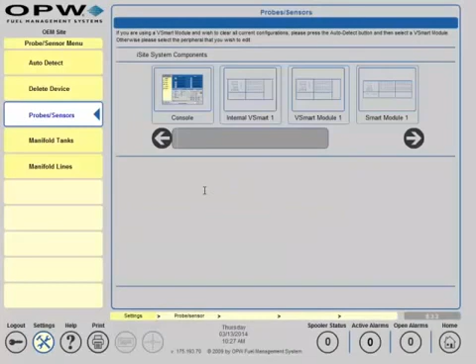But by selecting the yes button, you are basically deleting everything that was connected to the console in a prior programming mode. If you are doing an upgrade and you're adding a device to an existing site, you would definitely hit the no button to make sure that you're not wiping out any of the peripherals that are connected to the console. So as you can see, I've got the console that's up. I've got an internal vSmart, a vSmart Module 1, Smart Module 1, LIM Interface 1, and an OM4.

So now I'm going to go ahead and do an auto detect on the vSmart Module 1. And I'm going to click yes. This is brand new programming, so I'm going to go ahead and do yes. So it would wipe out anything that would be programmed on those barriers that are inside.

It's going to go out and find the probes and sensors that are connected to the devices inside that vSmart. We do have probes and sensors connected to this vSmart, so you will see when they come up, and we did wire everything in multi-drop. So you will see 4 probes on one channel, 16 sensors on another channel.

But the one thing you've got to remember is that when you're doing your auto detects, if it's a brand new site, you click yes on the auto detection. If it's an existing site and you are adding a device or changing out a probe or a sensor, you'll always want to do no. If you mess up and hit yes and then save it on an auto detect on an existing site, you will basically have to reprogram everything back in, because it will wipe out everything that was previously programmed or communicating to on those modules before.

Now once this comes up, you'll see the devices that are connected, and as you can see, I've got 4 devices on module 1, barrier channel 1, 4 devices on barrier channel 4, 1 probe on IS module 2, channel 2, and then 16 sensors on the last channel. Now if I want to do an auto detect on an individual channel, I can go ahead and do that. So when I'm changing out a probe or a sensor, this is the level 2, which is down to an individual device.

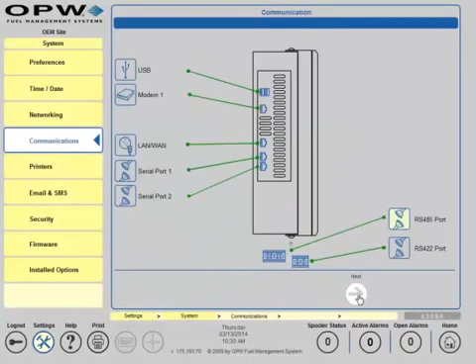Now one of the things that you have to remember is that if you are using a vSmart connected through a LAN connection, before you do your auto detection, you want to come to the settings, go into System, go into Communications, hit the Next button, and then you want to map your Petronet to the LAN connection. So you're going to highlight the LAN connection, hit Map, and then hit Apply.

Now this is only used if you're using the feature that the vSmart can be connected to the console over a LAN connection. One of the things you have to remember in this scenario is that the vSmart has to be on the same subnet as the console. I can't have the console on one subnet and the vSmart on another subnet. It won't go out and find it. But if you're doing that, make sure you do this step prior to your auto detection. Thank you.

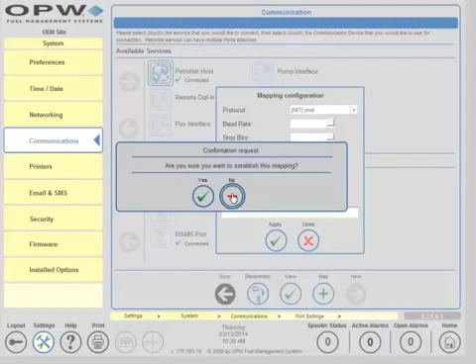Next, I'd like to show you how to put the address book and site summary into the console. From the home screen, hit the Settings tab at the bottom and then the Address Book tab along the left-hand side. Think of the address book as an Outlook contact list of contacts that will receive notifications from the console. So the first thing we want to do is hit the Add button and input your contacts. I'm going to put me in, my first and last name. Contact type is going to be administrator, manager, or technician. It doesn't have any security rights to be able to log in to the system. It's just a way for us to group contacts into certain groups.

The company is OPW. My phone number is 708-485-4200. Fax number is 708-485-4221. And then my email address, pneil@opwfms.com. Now, SMS is a paid text messaging service. It's not instant messenger on your phone. This is something that you have to have a subscription for to be able to send text messages to your phone. It's not something that a lot of people use, but it is a paid text messaging service.

Once you have your contact information in, hit Apply, and it will say that a new contact has been added. You'll see it pop up into the contact list. So let's add another contact. This time we're just going to add Lewis Bell. We'll leave Lewis as the administrator. He does work for OPW. And this time we're only going to put in his fax number. And then hit Apply.

So when we look at the first line, it says requires alarm remediation: on all alarms, only leak alarms, or none. All alarms means that any time that you have an event, whether it be a low product alarm, water in a containment sump, water in an STP sump, water in an annular space, these alarms would all have to be remediated by someone with remediation rights. If I only do leak alarms, these events are only pertaining to either a tank leak or a line leak.

And then none. None would be where the majority of these consoles are programmed, because most people don't want to have to go in and remediate. Well, what I'm talking about as remediation is that within the console I have the ability to write free-form text against any event that's happened in the console so that I can have a historical record of what a technician or a manager has done to get the alarm to clear.

So if I do none, then this icon down at the bottom won't show any numbers going up. It'll actually be removed from the screen. If I do leak alarms or all alarms, then that number increases every time that I have an event in the console, but it stays active until somebody goes physically into that event and remediates it to clear it. And we'll show you that in an operations manual that shows you the freeform text that we have available.

The next one that you see is buzzer duration. Now the buzzer duration is just that. It's the piezo alarm that's inside the console.

This buzzer will go off until the event is acknowledged or until the event ends or acknowledged. I would normally do the event ends and acknowledged because if I have a low product alarm, I don't want to have to go in there and acknowledge every time I have a low product alarm. I want that event to automatically clear as I get a delivery.

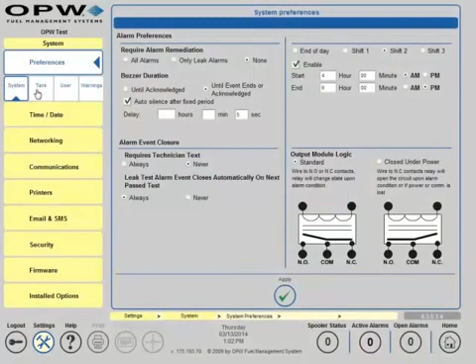The next tab you see is the tank tab. This is the tab on how do we want things to happen within the tank. So time until run out on the main screen, you have the option of having it on a low threshold or a tank empty. Most people will use it as a low threshold. It's just a calculation to tell you how much product you have in the tank using the last couple of days as a baseline of how much product you're using per day, per hour, per 24-hour shift.

Manifold logic is either a gateway valve, a siphon, or a true manifold. Gateway valve is 2 vertical tanks with a valve in the middle so that I can open and close the valve to get the tanks to balance. A siphon is a true siphon that's underground, where it's using a venturi off the motor to draw product through a siphon line between the 2 tanks. The third one is a true manifold. This is where I have two AST tanks combined by a pipe between the 2 of them at the bottom, and they use hydrostatic pressure to keep the 2 tanks level.

Now, if I'm running STPs being controlled by a LIM, your STP shutdown, I can shut the STP down on a low product, a high water or phase separation alarm, or a probe down. But the fact that I don't have any probes and everything programmed yet, this one would be something that we would have to come back and actually set up. But I can go ahead and say that I want it shut down on a low product alarm and just hit the apply button.

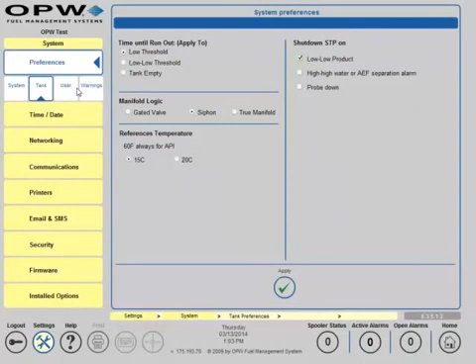Now, if I look at users, it's just that. How do you want the console to look? Whether it be English, English Spanish, English German, English French, it's just a matter of them selecting the language that they want and then going ahead and hitting apply. Now, the console has the ability to have multiple languages displayed by the user login. So once the user logs in, either the administrator or a technician, we can change the text to that particular language as the user is so defined.

You just have to be careful when you log out. If you want it to be English as a technician but something else as a default user, you have to come back to this screen and change it underneath the default settings or under the default user settings so that the language just changes when the default user is logged in.

The home screen option B is the standard option that you normally would have, but you do have the option to mask the bottom 2 icons and only show inventory and delivery. But for the most part, you're going to leave this as option B. The other one that you have is product height instead of time until run out. Remember how we set up in the last tab that we could do time until run out at low, or AEF. You can actually mask the time until run out and show product height instead of that on the main screen.

Hide water height on inventory screen. This is something that is used in Europe where they measure things in millimeters and centimeters, and they want to be able to remove the water height in the inventory screen. It's just a matter of checking the boxes, and it will actually remove that from the home screen and from any of the printouts.

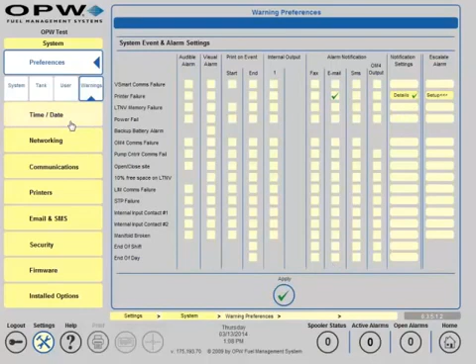The next one that you want to look at is the time and the date. Time and the date is just that. We see that I'm now on Thursday the 13th, got my time at 1:08:39 p.m. Don't know if that's right or not, I think it's actually 1:10 my time. So I'll go ahead and change this to 1:10, and then just go ahead and hit apply, and it'll actually save the time to the current time.

Okay, we're still logged in as the administrator underneath the settings tab. So the next one that we're going to go through is networking. Go ahead and click on the networking button. Now, the most used quadrant in this screen is the bottom right corner. This is where you're going to set up your direct connect, either through a PC or through a crossover cable.

The unit has the capability of running DHCP or static. So if I'm running static, I just go ahead and put in the static IP address, the mask, the gateway, and the DNS. Just remember that if you're setting it up through a crossover cable and you want to connect to the gauge, your computer has to be one address higher or lower than the actual gauge itself to communicate over a crossover. With that, I would set your laptop up 10.35.6.80 or 82, because the console itself is on 81.

Then if you want to do it under DHCP, you can give the IT guy your MAC address, and he can give you one that's going to be given to you every time from the network. Or you can do it under name recognition, so they can assign that MAC address to a name, so that you're basically just typing in iSite or Integra at something and going ahead and hitting the IP address.

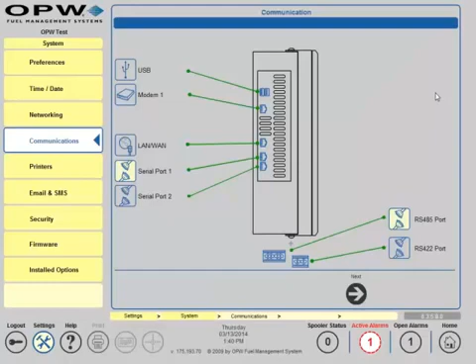So if you go ahead and hit the next button, you can see the top one is services and the bottom ones are functions. So if I want Petronet to talk over LAN, I highlight Petronet, highlight LAN, and then I hit map.

And then I go ahead and put in the protocol and then hit apply. If I want to do a pump interface, I just do pump interfaces, and this is your standard Veeder-Root POS commands. I can select the serial port, the LAN WAN, or a modem, depending on how you want the unit to communicate out through the box.

So I'm going to set up POS through a LAN connection and hit map, and then use the protocols. What protocols do I want? I've got standard 350, TLS 350, Smith protocol, PV4, SPC 350, and GLX 2000. For the most part, people will use the TLS 350 — these are the most widely used POS interface commands.

And then you're just setting the baud rate of your communication. If you're doing it over a LAN connection, it really doesn't have to have the baud rate. You just get rid of this default password and hit apply.

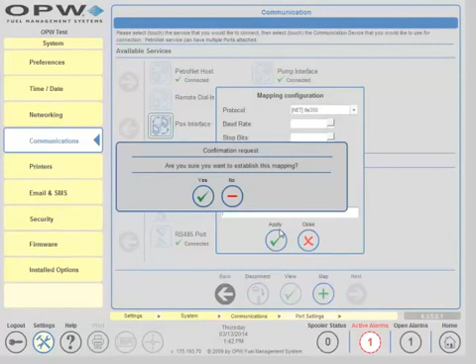If you're going to do the POS over a serial port, then you have to select the serial port you want and the baud rate. So I'm going to do 350 again — 9600, N71. We are using metric, and then we get rid of the default password, and then we just hit apply.

So now if I want to come back and see what I actually programmed in there, I can go to pump interface, and it tells me that my pump interface is connected to the LAN and to the serial port.

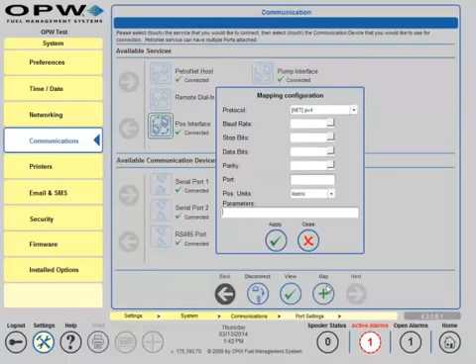So I'm going to go ahead and do the LAN port. Instead of doing map, I'm going to do view, and you can actually see the POS interface both to the serial port and the LAN WAN connection. Go ahead and hit the close button, and then the next icon you see is the printers.

Printers is just that — if I want to add a printer, basically what you're going to do is plug in your USB printer and then hit add, give it a printer name and a port, and then hit apply. The easiest thing to do when using the USB printer supplied with the Integras is just plug it in and then power cycle the printer power, and it should come up under here, and then you just hit apply, and you can set it up as the default printer.

The default printer — once it's set as the default printer, that's where your printouts will come in. But you can set this up on a network printer. The problem with setting it up on a network printer is that it has to support PCL4 or below drivers. So it's usually just plug and play.

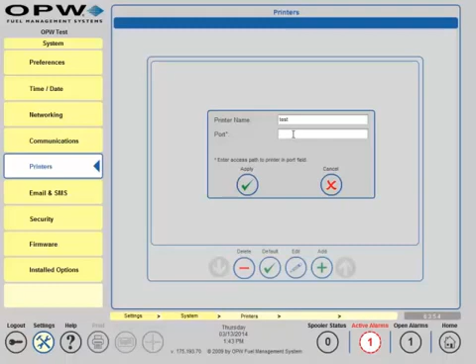I can set up a network printer if I know the network address of the unit. So the printer name is just going to be a test print, but my port number is going to tell me exactly where that printer is on the network, so that I can print to that network printer.

Emails and text messages. So what we're looking at is the server name, the port ID, the user, the password, and the email address. The server's name is going to be some type of SMTP or mail server. Gmail and Hotmail don't work — we would see them as a spam address.

The port number, you can put your port as pretty much anything you want — port 80, port 560, it depends on the IT people as to what port they want to open up for you to send out emails from the console. If you're using some type of SMTP authorization, you will need a user and a password, as well as the email address. When you're putting this in, if it's using some type of authentication, think of this as a computer on your network.

Your computer has to log into the network to put in your credentials. Same thing here — you're going to have to put in your username, password, and the email address to get this done. So what we do is we just do SMTP dot...

att.net. Let's say it's on port 80. I don't need a username or a password if I'm using just a standard SMTP. And then my email address — what we would normally do is just use Integra and then whatever the domain name is that you're using. I'll just use OPWFMS and then go ahead and hit apply.

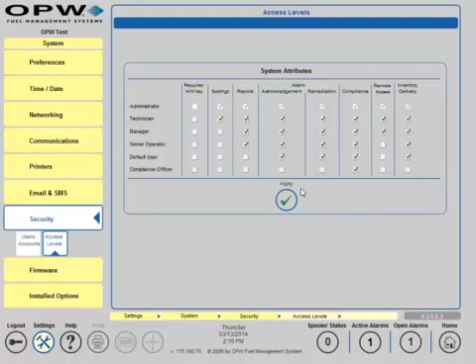Once you have the access levels done, go ahead and hit apply and then hit OK to save.

When I'm looking at the firmware options, firmware is just that—it's how I upgrade the system. I can plug a thumb drive into the side of this unit and hit browse, either on my desktop or the thumb drive, to look for the upgrade files or option files. An option file would be a .srs file. This is if they want to add an option like SLD, ACR, or line leak to an existing system. If they want to do a firmware update, it would be a .cab file.

What you do is find the file, load it in here, and do upload. Once you finish the upload, then you do upgrade. Depending on the type of upgrade—a software update—you'll be forced to reboot the machine, and it will automatically reboot for you. An options file will just log you out and you have to log back in.

These things are done automatically, and I can do them remotely or through the front panel. It does not matter how you do a firmware upgrade, a software upgrade, or even change the option files—it just depends on the type of file you use. Most people will do it on a thumb drive, some load it to their desktop, and we actually have technicians that do it remotely. So it's very flexible in the way you would go ahead and program the system.

The next option you see is installed options. Installed options are just that—it's telling you what is installed within the console, and each checkbox shows what's set up. This one is pretty much set up for everything: dynamic SLD, 0.1, 0.2 tank test, LLD ultimate and comply.

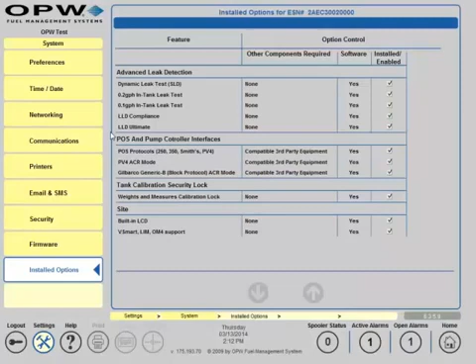Now that concludes the ones we have for this tab. So go ahead and hit the settings button at the bottom, and then we come back—we did the systems tab, so now we're going to come back to products. Before you go into the probes and sensors to actually start programming the tanks, you actually have to create products.

So the next thing you want to do is go ahead and add a product. My product ID is going to be 1, I'm going to do gasoline, and let's say I'm going to do premium. Then I'm going to go ahead and hit apply, and now it's going to create that product ID number. You can create as many product IDs as you want, but normally what you would do is create your premiums, your unleadeds, your diesels.

But you can also create a blended product. So let me go ahead and create regular. My ID is going to be 2, it's got a gasoline product, and my name is going to be regular.

Then when I add, now I've got premium and regular. But if I have a POS that needs to report on a fictitious tank, or a plus tank at a blended site, and it's only sending me blended data for plus—not 60% regular, 40% premium—I have to have it report on that plus product. So what I would do is go ahead and add, and say this is product ID number 3, and it is a blended product.

My product ID is 3, my product name is plus. My high stock is going to be the premium tank, and my low stock is going to be regular, and it asks what is my high stock ratio. I just put in 40%, then hit apply, and it will create the plus product.

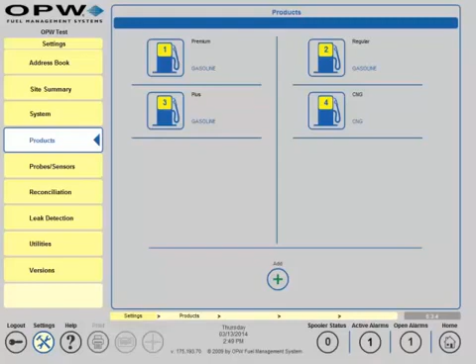We've just got finished programming all the products. You're still logged in as the administrator underneath the settings tab. So now what we want you to do is go ahead and hit the log out button, click yes, because we want you to log out and log back in under your username and password. I'm going to go ahead and log in under mine, which is tech.

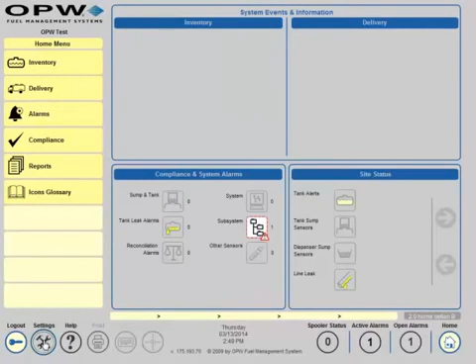Make sure that you create your own user login, your name, your last name, your tech ID number, and your password. And this is to protect you so that when somebody else makes a modification to the system, it's traceable back to that individual. Go ahead and click OK to log in. Go ahead and hit the settings tab again. And then we're going to go in the probes and sensors. And now you see everything that's in the console.

So what we want to do is go into the vSmart Module 1, and we're going to start programming the devices that we have. So the first thing that I want to program is my tank. So I'm going to go to the barrier number 1 with 4 probes on it. So let's say 1052 or 10521, which is the serial number. Let's say this is my regular tank. So tank ID is going to be 1. My name is going to be regular.

Now I can select a product. And this is why I had you create the products before you go in and program the tanks and sensors. So now I can come in and select my regular. I'm going to select the type of tank that I have. Straight sides would be a vertical tank where everything is the exact same inch reading on the vertical rise. Cylindrical round, cylindrical flats. Cylindrical flat would be a steel tank. Cylindrical round ends would be your fiberglass tanks, and then your dish shape would be like a ball.

Depending on the type of tank that you're going to put it in, I'm going to say that I've got cylindrical flat ends. I've got a 92-inch tank. My tank capacity is 10,000 gallons. And it'll automatically calculate 95% as my safe working capacity. And then product offset. Product offset is moving the probe within the tank to make it either match the stick or move it to the middle of the tank.

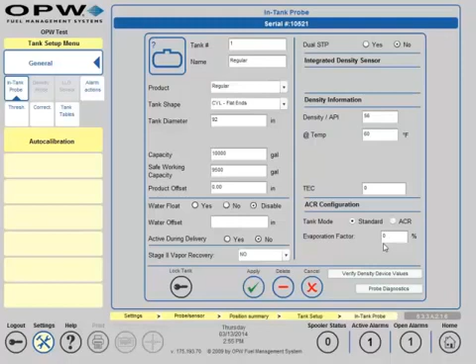Evaporation factor: in the manuals you'll see an evaporation factor. Diesel is one value, gasoline is another value, and this is really from before they started putting in the PV vents, the pressure vacuum vents, because you knew you had an evaporation factor on gasoline and diesel. Just as wind's blowing over a rain cap, it's sucking vapors out of the tank, causing the tank to lose product. Well, you need to know what that evaporation factor is when you're programming these consoles, because it could affect you in your tank test. Once you get everything programmed here, go ahead and hit apply, and then OK.

Now that I've got the tank programmed in there, I can now have the same alarm actions that I had on the console, but these are now alarm actions within the regular one tank. So I've got my high product, low product, high water, probe failures, RTD thermistors, warnings, density variations, theft. It's just a matter of going in there and saying what event do you want to alarm on, and then I can either set off the audible, visual, print it, an internal relay. I can turn on email notifications.

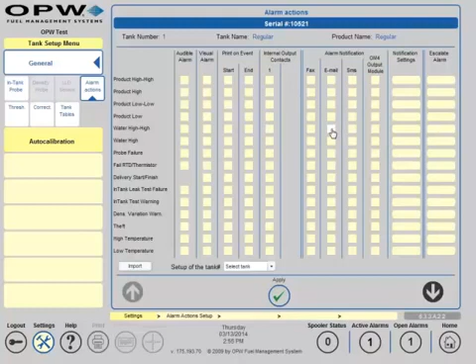So let's go ahead and say I want to do a high water notification, and I want it to go out via email. Well, the only people that have got an email address in this are me and Lewis. So we'll go ahead and I'll select myself, hit apply. See, my name comes up in the email list, and then I hit apply again. And now I've got the details box. Well, the same escalation factors that we had before, I also have them in the notifications for tank and sensors. So you have the ability to escalate a normal output at least 3 times. So if you get an event, it can be escalated.

The escalation can be taken care of as long as you just go ahead and acknowledge it, or until the event ends and then you just remediate it in the service. So we're going to go back to the thresholds. Now thresholds are just that. This is where you want to go ahead and program what alarm points you want inside the tank.

Now what you have is the checkboxes along the left hand side of these columns. These are the items that you want to have an alarm generated for. So if I don't want to have a high product alarm, I just uncheck this box and it will never create a high product alarm. But you have to make sure that if you're doing your in-tank alarm actions, high product and high product alarm actions, that you have these checkboxes checked, or you would never get that alarm action to happen. I can do a height or volume notification for any one of these settings.

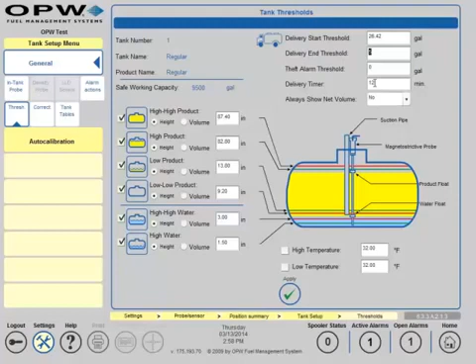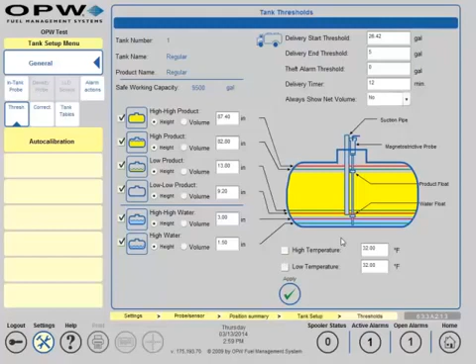Always show net volume. Net volume will either be yes or no, and it's just a matter of whether we're going to net correct the inventory and the gross gallons back to 60 degrees Fahrenheit. The bottom 2 right here are your temperatures, high temperature, low temperature. These are not normally used unless you're looking at some type of DEF tank or some type of tank where you want to be able to control and monitor the product temperature. Some DEFs, when you get around 34 degrees, start to congeal, so you have a heater, and you can set off an alarm to let somebody know that the product temperature in that tank is becoming very high or very low.

Once you finish everything, go ahead and hit apply. And then once it's finished saving all the thresholds, then you can hit OK. Now, once you do this, you have the ability to do the correction table. I'm going to go ahead and do the correction table, and this is where you can add correction points to a tank. And it's just a matter of saying at this inch reading, so I'll just say at 10 inches, on a 10,000 gallon tank, I've got 1,000 gallons, and then add.

If it's outside the variance, I can still hit OK or yes, and it'll go ahead and add the threshold to it. But if I continue putting in points that don't seem to match, and I keep getting these reactions, you may want to make sure that you haven't selected the wrong end shape of the tank or the highest volume in the tank, because that's usually an indication that you have something programmed incorrectly.

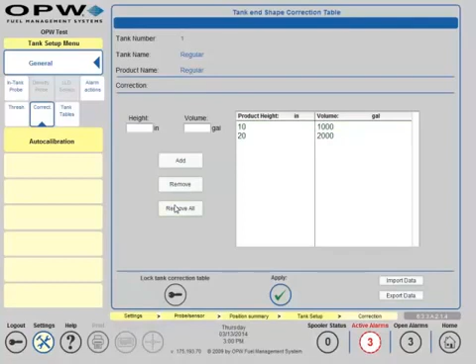So I'm just going to go ahead and remove all of these, and I'll show you the tank chart. So with this tank chart, I'm going to say I want it to start at 0, step every 2 inches, all the way to 92, and I want to show the points. This gives me the ability to actually look at the chart that the gauge has created.

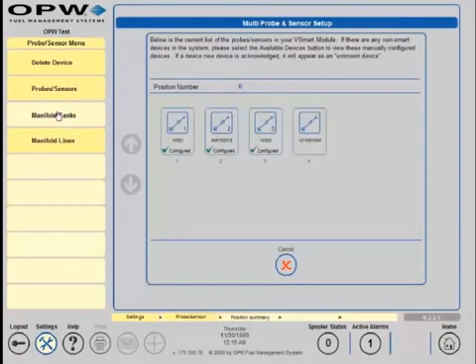So I'm still logged in as a technician, and underneath the settings tab, I've gone ahead and configured 2 more probes underneath the in-tank configuration under probes and sensors. And what I want to show you now is the manifolded tank and manifolded line application in the Integra and the iSite.

So underneath the manifolded tanks tab, you can now see that I have 2 regular tanks. By selecting the regular tanks, I can then hit the manifold button at the bottom and give it a group name. So we'll name this one regular, and we'll name it group ID number 1.

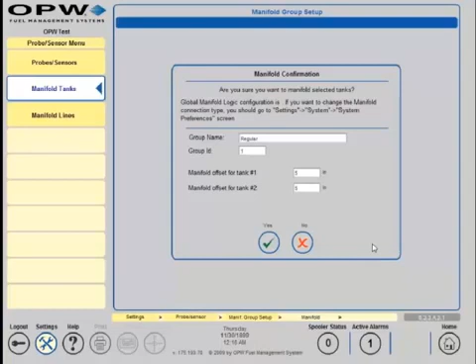And then the manifold offset for tank 1 and tank 2, this is looking for a differential in inch readings between the 2 tanks. So that if I put 5 inches in tank number 1, 5 inches in tank number 2, it's looking for that number to be greater, and it'll give you a tank siphon break alarm.

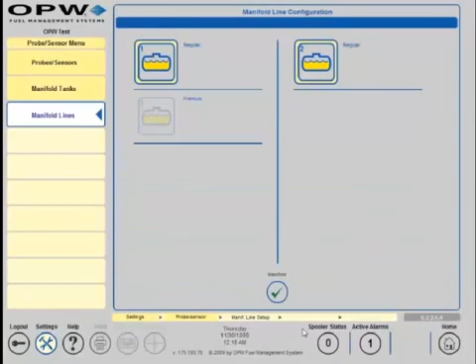If you're looking for manifolded lines, when I select the manifolded lines, I can go ahead and select tank 1 and tank number 2 for regular, hit manifold, and now I have the option of either alternating the operation, which will bring the tanks down evenly, or I can bring them down sequentially, either to a low-level alarm, set point, oldest delivery, or preset volume.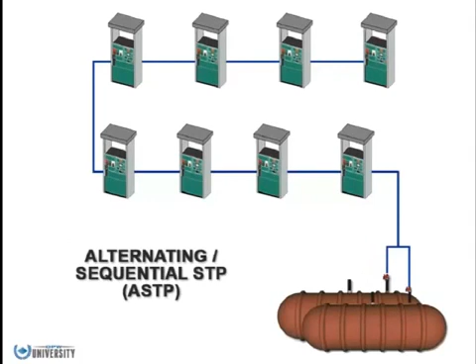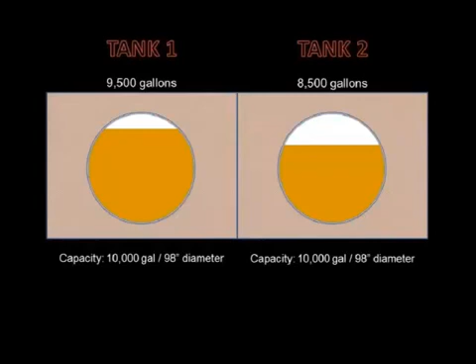To give you a little better explanation of what we're talking about with alternating STP, if you look at the diagram, we have a single tank with 2 motors in it feeding 1 line. Same scenario, I've got a motor in each tank, 2 tanks, both tanks feeding the same line. Or I can take it as far out as having 4 tanks, 4 motors feeding 1 line, say at a truck stop application.

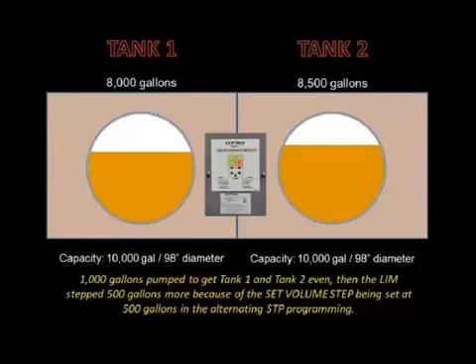When you're looking at the scenario that we're talking about, what we have here is tanks that are the same capacity and the same diameter. So I can step by 500 gallons from tank 1 to tank 2. So if you look at the line, the hook signal comes in. We show the hook on both motors, but we're actually denying motor number 2 from running. Once tank number 1 depletes by 500 gallons below tank 2's current volume, then we'll go ahead and switch over to tank number 2.

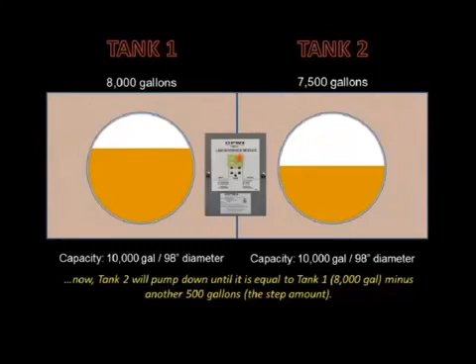We'll bring that tank down by 500 gallons below tank number 1's current volume, and then we'll just keep toggling them back and forth until they become even, and we're stepping them down evenly till each one of them reaches a low product alarm.

In the scenario where I've got tanks of same diameter, different capacity, I have to now step them by 5%. You can set it to anything you want, but 5% is a very easy number to bring them down evenly. So we'll pump on tank number 1 until its capacity reaches right at 75%, and then we'll switch over to tank number 2, and then we'll bring it down until it reaches 70% capacity of its current volume, not its diameter, but its volume in the tank. And then we'll just keep switching them back and forth until they become even.

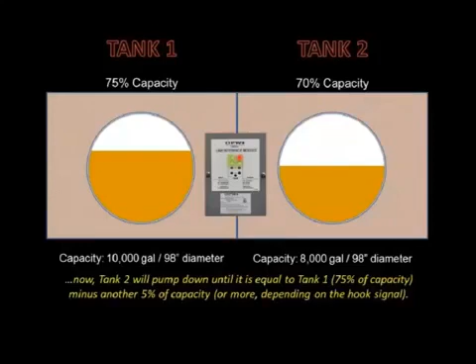Now, in the scenario where I've got tanks of unequal diameter and unequal volume, we would step them down by 5% capacity of the tank. When we're looking at sequential dispensing, we'll stay on tank number 1 until it reaches its set point to switch over. Then we'll switch over to tank number 2 until its switch point is set. And then we'll bring the tanks down one at a time until they reach the low threshold.

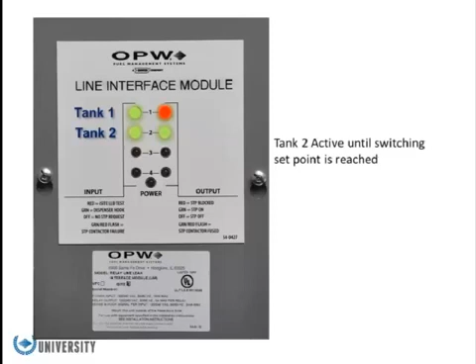So in summary, the ASTP settings, the two scenarios that you have is alternating STP. With alternating STP, one of them you step by volume. This is for tanks of equal capacity and equal diameter. The other one, if we want to bring them down evenly, is done by percent of volume, and these are for tanks that are unequal capacity or unequal diameter.

If I'm going down with sequential STP, tank capacity or diameter doesn't matter. I can bring them down until I reach the low level threshold. I can switch over on the oldest delivery, or I can actually have a preset volume set in the tank gauge to step them down until it reaches that preset volume, and then it'll automatically switch over to the next tank.

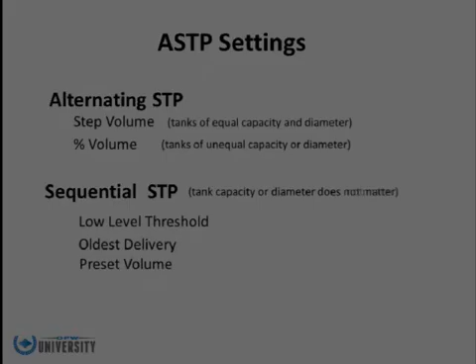Now we'll go back to the gauge and start looking at programming line leak. So now that we've finished alternating STP underneath the Manifolded Lines tab, let's go ahead and look at sensor setup. So I'm going to hit the Probe and Sensor tab. It'll bring me back to the IS barriers that you see on vSmart Module 1. And as you can see, I've got 16 sensors connected to one IS barrier.

It's the channel 4 on IS barrier number 2. Well, as soon as I hit the icon, it'll bring up all the sensors that are connected. Now, one of the things that you want to look at is that in the order in which you want them to show up on the report, that's really the way that you want to go in and program them.

So let's say sensor number 9 is the first one on the report that I want it to show up as, and this is an annular sensor. So I'm going to go ahead and click on it, and as it comes up, it'll show me that it is an interstitial float sensor, small plastic, the model number and serial number of that device, but it also gives me its physical location on the IS barrier inside the vSmart.

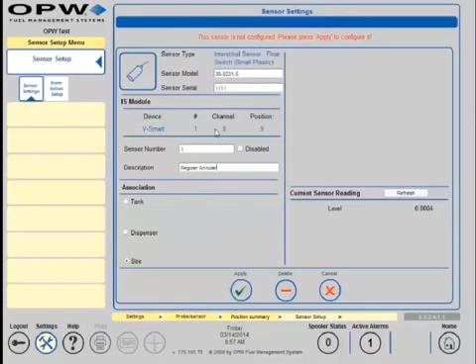But since this one is on position number 9 and I want it to be the first one in my report, what I do is I just say this is going to be sensor number 1, and then I give it a name. So this is regular annular, and then I can go ahead and assign it to tank number 1 on regular, and then hit apply. And that will show up as the first sensor on my report.

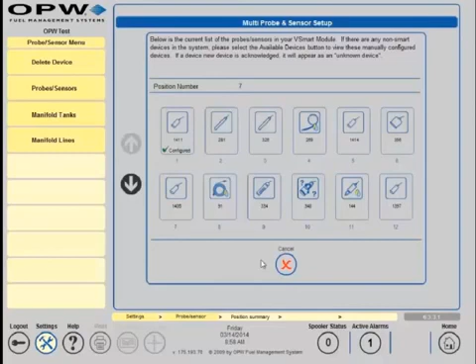So now if I come back and look at my position summary, it has now taken that sensor and moved it to the first configurable spot. Then I can just go and complete the rest of the 12 sensors and put them in the order in which I need them to show up on my report. If you have any other questions about configuring probes and sensors, go ahead and look at the configuration manual.

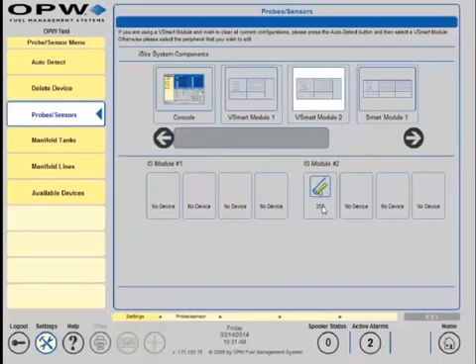Now that we got all the sensors configured in the Integra or the iSite, let's go ahead and program our line leak. First thing you want to do is go back. I've actually found the LLD sensor on vSmart number 2, barrier 2, channel 1. Now you're tempted to go ahead and try to click on that icon to program it like you would a normal probe or a sensor, but a VLLD sensor doesn't program exactly like a probe or a sensor. You actually have to program the LLD underneath the probe.

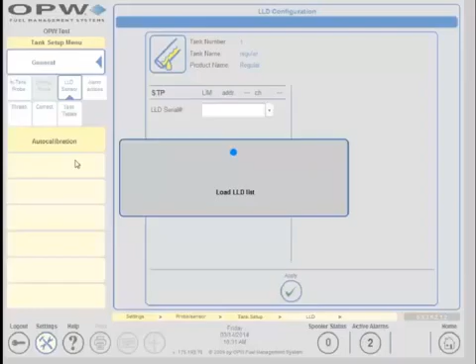So what you're going to do is go back to your probes that are configured, and I'll go ahead and program this one underneath regular number 1 tank. So this is tank number 1 regular, and if you notice, this little icon will become active once we find an LLD sensor. So let's go ahead and touch the icon, and now we go ahead in the serial numbers, and we're going to find the serial number of the LLD that we want to program.

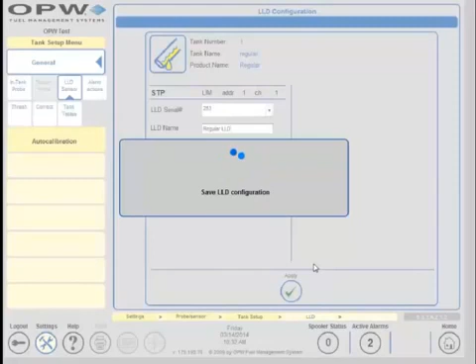So all we're going to do is grab sensor number 253 and then give it a name. And we're just going to give it a regular line name. Once you give it a name, go ahead and hit apply. Now all you're doing is linking the LLD to the tank itself. So that way if I need to shut down on a low product alarm, high water alarm, or an aqueous ethanol phase separation alarm, I know what tank to tie to that LLD.

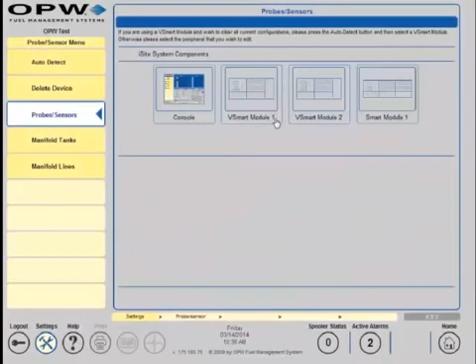Now once it's configured and we save this, now that you've got your LLD configured to the tank, we need to go ahead and program the LIM, which is going to control the pump relay. So if you go back to settings, go back to probes and sensors, let's go ahead and select the LIM interface module. Now we know that we've wired up the regular to the first channel, so we just need to map the channel to the tank. So that way we're tying the relay to the probe to the sensor.

So if I select channel number 1, I select regular tank number 1, and then go ahead and hit apply, what I'm basically doing is just completing the map. As soon as you do this, the system will want to try to run a 3 gallon per hour line test. So before you do this, you want to make sure that everything's buttoned up and you're ready to actually run a 3 gallon per hour line test. Then go ahead and click OK.

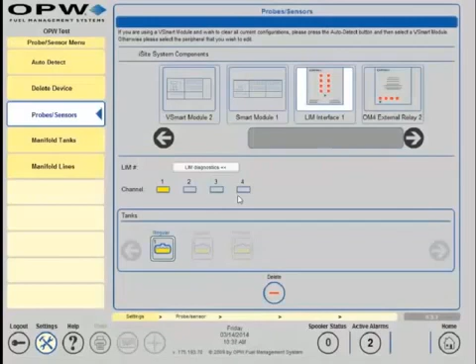Once you have the LIM configuration complete, you'll need to go back to settings, go under leak detection, and then we're going to go to line leak settings. Under line leak settings, you would go in and grab the regular LLD that you just configured.

You'll grab the regular LLD that you just configured. It tells you that you're on LIM address number 1, LIM channel number 1, and the serial number. But what you need to do is come in here and actually select how you want this thing to run.

The first thing you're going to look at is the number of 3 gallon per hour tests. The number that you have right there, we have it set to 5. This is 5 maximum retries that an end user can try before we actually lock down the system, before a technician would have to come out and run a retest.

I don't like 5, but I will go normally with 3, because they failed the initial test we would give the manager an additional 3 times to run a test. Now an abort does not count as a fail, but it's 3 consecutive fails in a row that would lock it down so that a technician would have to come out and actually run another line test.

The other thing that you have to program is your auto test. If you check the auto test box, you can go ahead and select 0.2 or 0.1. And then your manual test - when you select manual test, this is what you want to run right now. So first you want to go ahead and select everything except your manual test and hit apply. The manual test is usually run when you're actually at the site and a technician wants to run a manual test when he walks up to the console.

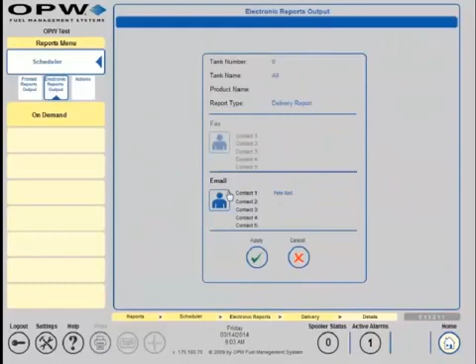If I come to the details, it shows me I've got an email report ready to go at 6 a.m., and it shows me that I'm the one that's going to get it. So we're just going to cancel out of this now and go back to the home screen.

Now that we finished the delivery reports that we want to come out at 6 a.m., if I want inventory reconciliation or even a sensor status, I would program it the exact same way, and they would just populate the calendar so you can see how frequently you have reports coming out via email or fax.

If I look at the printed output, it would program the exact same way. The only thing is it's just going to a local printer connected to the gauge. Same thing if I go into inventory, I can select the regular tank or all tanks.

I want it to come out daily, say every day, or I want it to come out either Monday, Tuesday, Wednesday, or every third day, fifth day. If I want it to come out on a weekly basis, I can set it up for Monday, Tuesday, or Wednesday, and it'll come out on that day. Monthly, yearly, same thing. And then I set up the time.

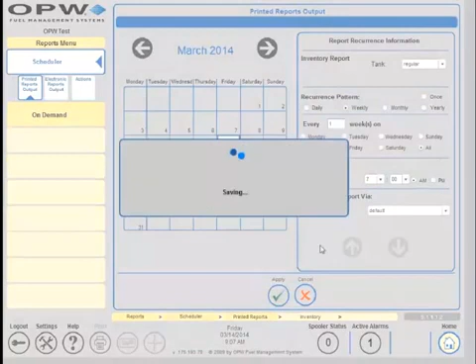I'll go ahead and set this one up for 7 a.m., and I want it to come out to the default printer, and then go ahead and hit apply. Do you really want to save? Yes, changes have been successfully saved.

And now you see that they'll come out every day on Friday. So that's the way that we had it set up.

If I want to go back and edit this, I just click the details. I come back and say I don't want it to come out on Friday, I want it to come out every Monday. And then hit apply. Then it'll go ahead and move the dates and change everything. Instead of coming out on Friday, they'll now print out on Monday.

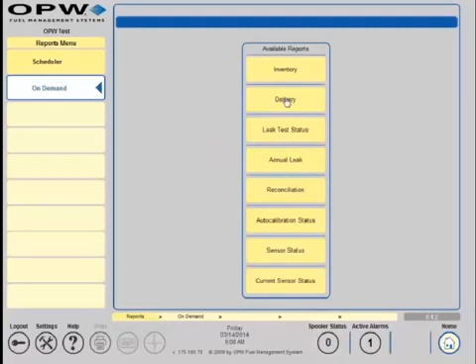Once you've done all your printed reports, on demand is a little bit different. On demand, you're actually looking for information that was saved from prior either printed or electronic reports that have been saved in the system. So let's say I want to come in and look at a delivery.

On demand, I'm saying I want to look at my regular tank or by product, and then I say I want to do a date range. So I'm going to say March 1st through March 15th, and I want to prepare the report. What it's going to do is go back into the database and try to find a delivery report between that date range, and it'll pull it up.

Once it pulls up the report, and I don't have any in this test system, once it pulls it up, you have the ability to view every one of the reports, as well as print each individual report, and then you can go ahead and do it that way or go back and look at it through the calendar.

Now that you've completely programmed the console, from the home screen go to your settings button, then your utilities tab, and you have the ability to do a backup and restore. There are two backups and two restores. The backup configuration is just the configuration of the console. The restore configuration lets you restore from that configuration backup.

What we tell everybody is once you've programmed the console, do a backup of the configuration. Once you have this, go out and do all of your testing - test your probes, test your sensors, test all the functionality of the console. Then come down and do a cold start.

After the cold start is finished, it'll go through a reboot and come back. Then restore the configuration from where you were prior to setting off all those alarms. This way you don't have all those events in memory, so a regulator coming in won't see all those events populated in the calendar. By restoring the configuration from before you started, none of that information will be in there. That's probably the only time you'd use the backup or restore configuration function in the gauge.